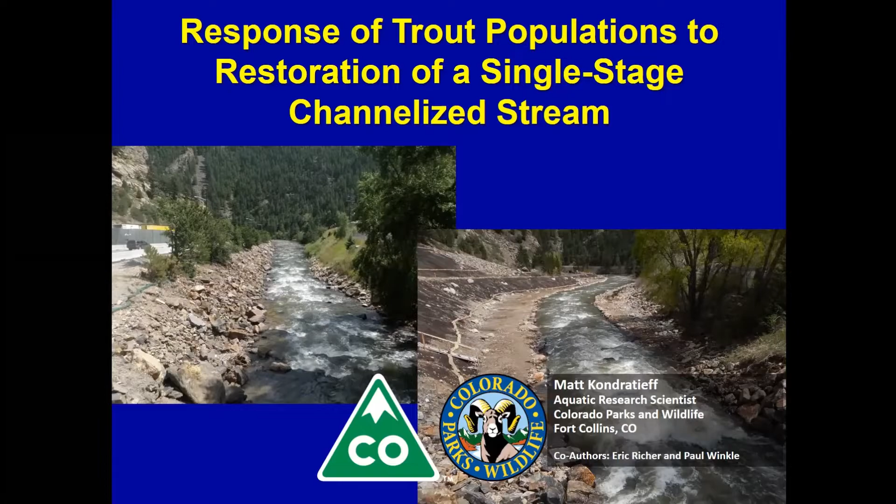So again, here's a picture of Clear Creek. This is a representative section of Clear Creek where, as you see, that's Interstate 70 on the right side of the photo with all the traffic. And then there was an old railroad grade on the opposite side of the highway. So a typical channelized single stage channel.

If you've never been to Colorado, this little project is located maybe half an hour to the west of Denver, and it goes through this little town of Idaho Springs. And like I said, it was a mitigation project for a tunnel expansion. This tiny part of Interstate 70 tunneled through a geologic bedrock feature, and the idea of the project was to expand the number of lanes through this tunnel. In doing so, there was an opportunity to do some mitigation in the area as a way of offsetting some of the damage that was done.

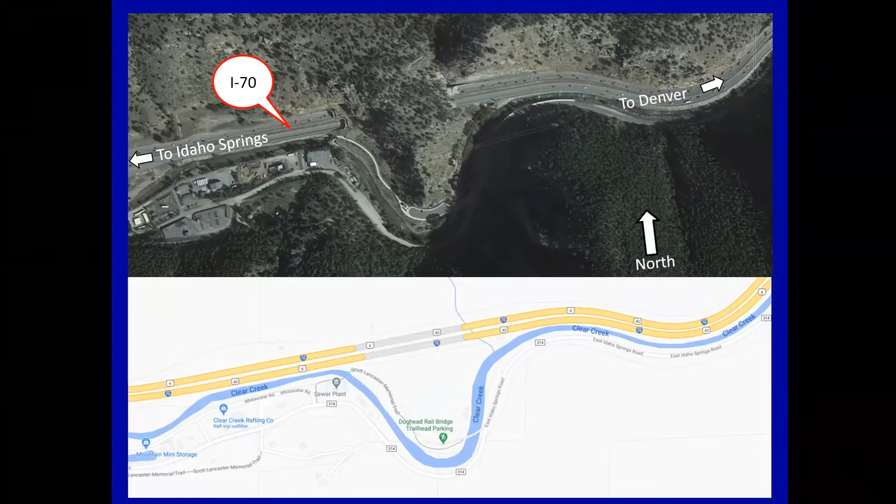So some of the goals that we came up with related to the idea of how do we enhance this trout fishery, and also the other part of that was, maybe we could try to restore this to a more natural, I wouldn't say reference reach, but we're trying to restore it to something that was more of a historic condition that would have been more the original channel form. So part of that involved, okay, well, we wanted to get rid of the riprap, so we were going to remove that armored riprap from the banks.

We were going to improve floodplain connectivity by converting the channel from a single to multi-stage channel and connect that stream to an active floodplain. Like I said, convert it from a single stage, meaning like that one cross section, expecting to contain all the expected range of flows that are coming down from the watershed. So we're going to convert it to a 3-stage, like a B(c) stream type. I gave this talk earlier to a group of folks who are primarily fish biologists, but I'll go through this real quick.

But the idea behind a single stage channel, it's a one-size-fits-all channel. For the most part, you're expecting that cross section to contain the majority of flood flows, all flows that are coming down. So you've disconnected more or less from the original floodplain. You typically don't have a lot of riparian vegetation because you've got armoring on the banks. You've got that 3-to-1 sort of slope. Typically they have very low bed form diversity in terms of pools, riffles, and even habitat. Boulders and logs and wood are typically kind of reamed out of the channel and removed.

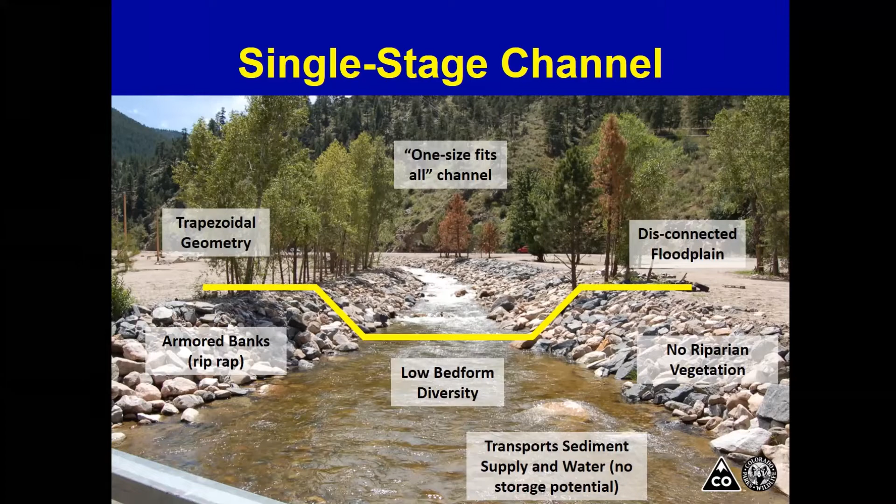So in contrast to that, what we were hoping to do was convert this back to a 3-stage channel or a B stream type. So in this case, you have the 3 stages: the low flow or inner berm channel, also known as the thalweg. So that would be the lowest elevation stage. Then that cross section's nested within a bankful stage channel that corresponds to that flow that occurs on average every 2 out of 3 years, roughly.

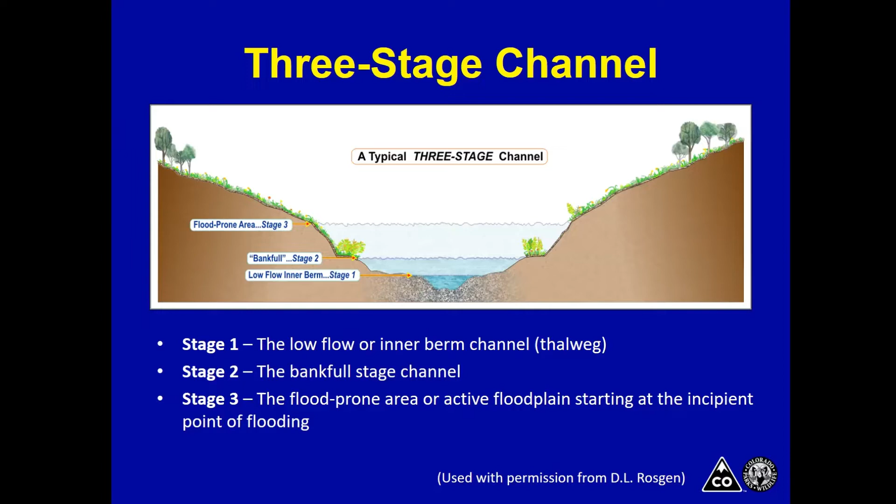And then creating a flood-prone area or the active floodplain that would start at bankful elevation and go up from there and meet up with a terrace at a higher elevation. So that would be used more to accommodate the flood flows and allow for hopefully some riparian vegetation like willows, alders, cottonwoods to reestablish on that surface.

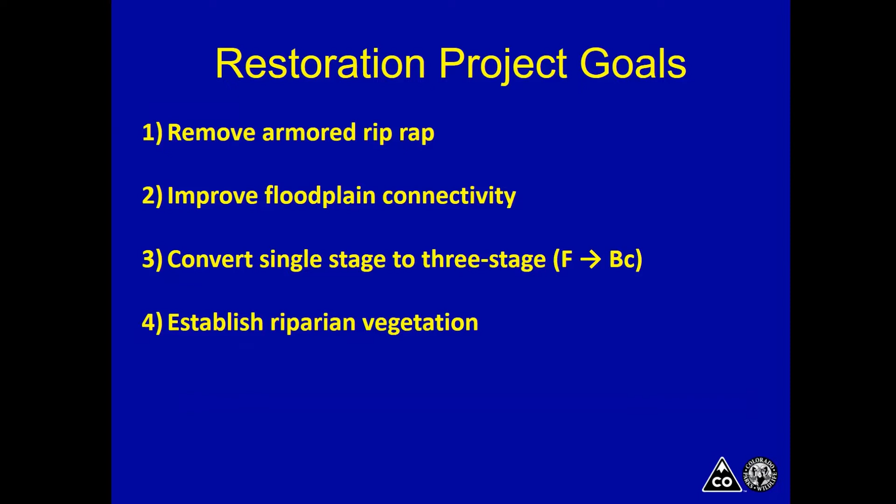So that leads to the next goal, which was to establish riparian vegetation through the means of establishing that active floodplain, and then enhancing in-channel bed form diversity features. And functionally, we were hoping for things like improved velocity cover for trout, so creating some locations where fish could find a balance between feeding and resting, whether that's in the form of cover or obstruction to flow like large boulders or logs or wood. Creating depth cover in the form of deep pools, and then developing hopefully some spawning areas for those trout.

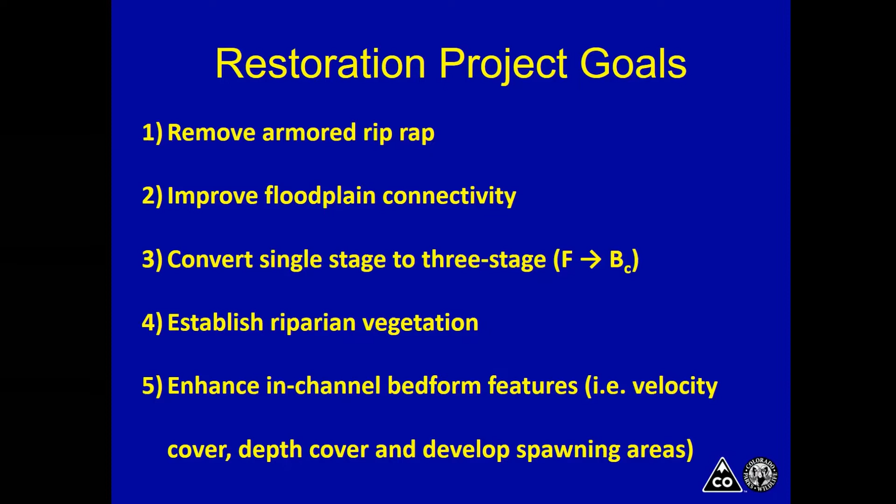It turned out that unfortunately we had planned to do work on this entire stretch related to those goals and objectives, but we were limited below the bridge due to the geology of the system. So we ran into some bedrock features that prevented us from expanding the floodplain, but also there was a house and some other infrastructure downstream that prevented us from fully converting the single stage to a 3-stage. We couldn't really get a floodplain established. So it became a little experiment at that point.

Our approach had to shift and change downstream of the bridge. So instead of being able to reform or shape or excavate the floodplain, create that new floodplain downstream of the bridge, it was just going to remain as a single stage channel. And we were then going to have to just work with that and try to do what we could to enhance the habitat in spite of that constraint.

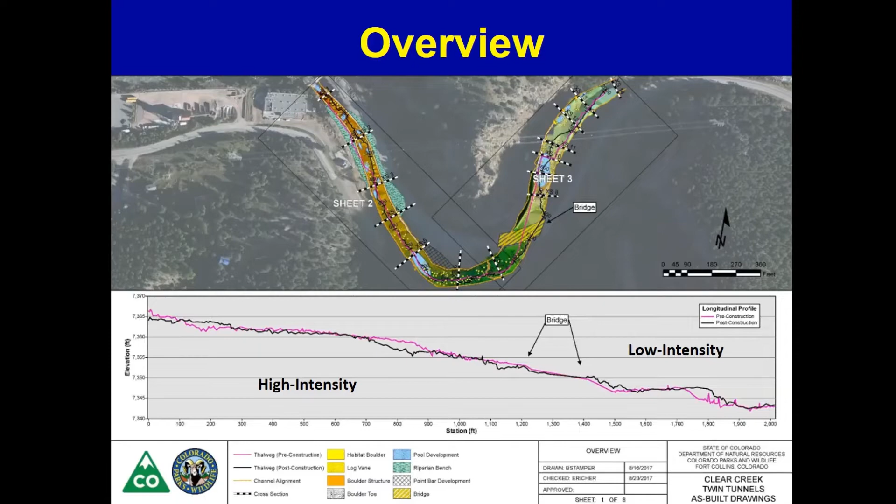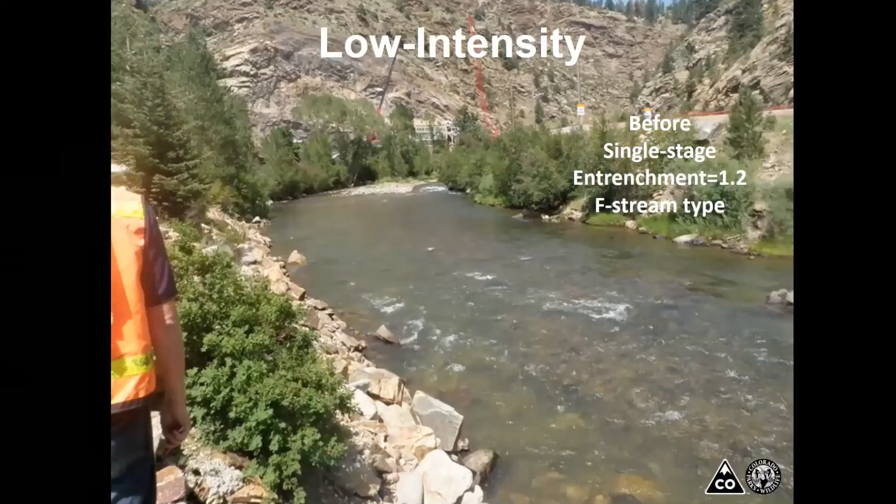So this is what it looked like. Again, low intensity. There's that island I was referring to in the downstream portion, and the side channel on river left. This is what this section looked like before construction, and it was a single stage. It classified as a Rosgen F stream type with an entrenchment ratio of 1.2. That's just the ratio of the width at bankfull contrasted with, at a riffle, 2 times the max bankfull depth, taking the width at that elevation: the ratio of your flood prone width to bankfull gives you an entrenchment of 1.2.

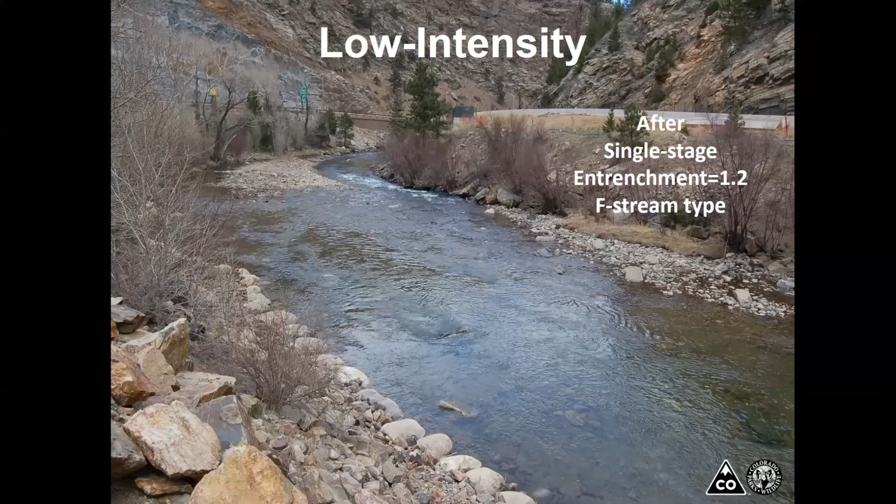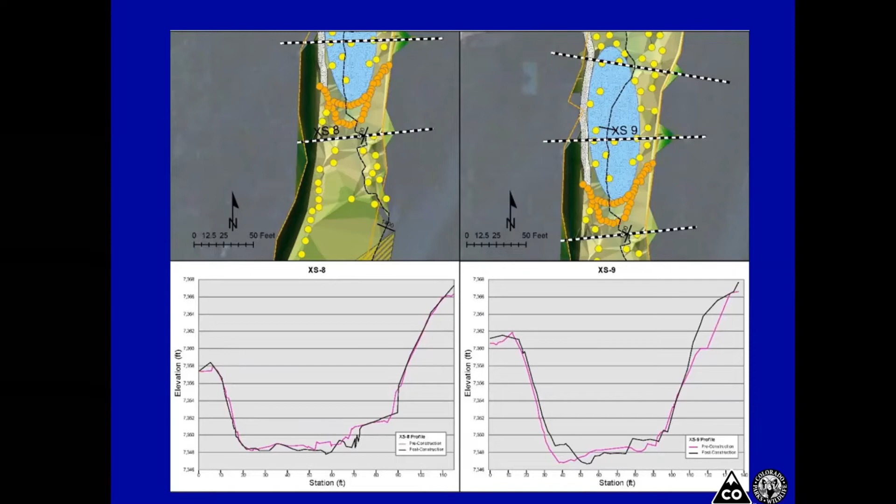And then another, cross section 9 downstream. The pink line again is pre-construction, black is post-construction. Notice very little change. We just shifted the thalweg slightly and you've got that pool now present, but not a whole lot of change at all with the floodplain.

So in terms of what we did in the low intensity reach, we added 81 single habitat boulders. That was 35% of the total project. Boulder structures, in terms of a cross vane, we had 1 of those. There were 9 total in the project, so that's only about 10% of the project total. Boulder toe, 9%. We didn't need to do much because the banks were still riprapped and armored. Pool development, we created 4 pools. Point bar development, 0%, and the big key there is no floodplain development, 0% effort in that reach.

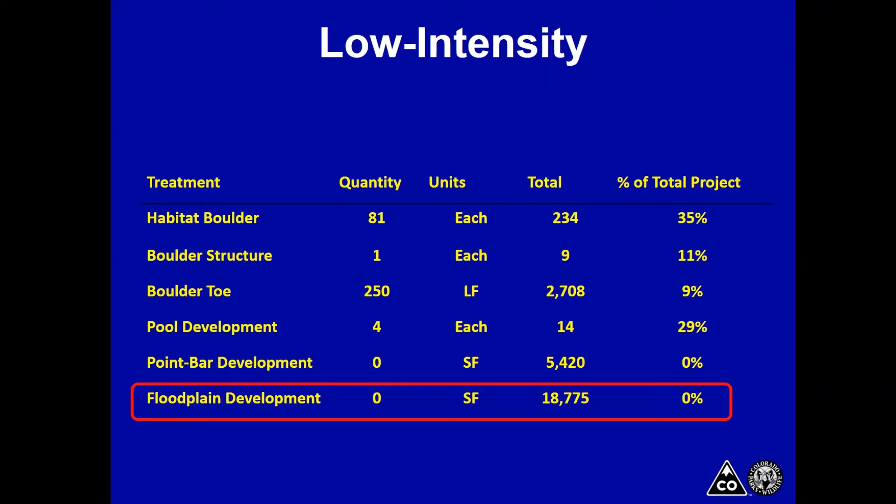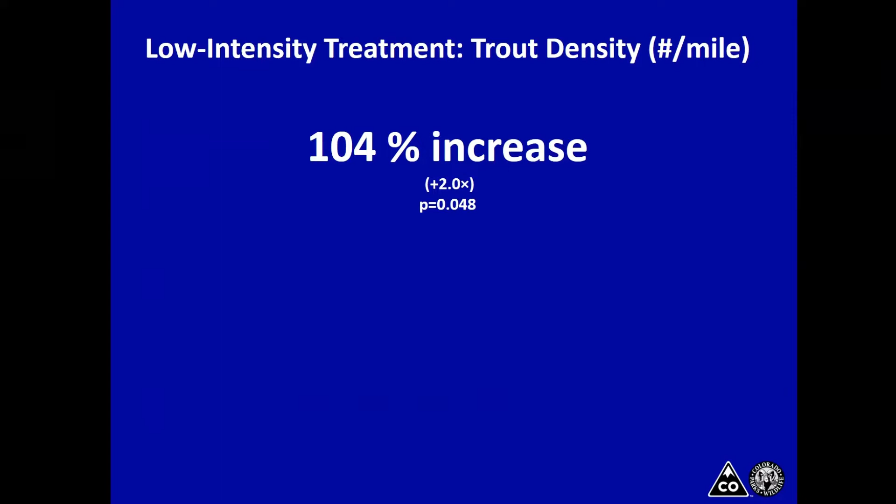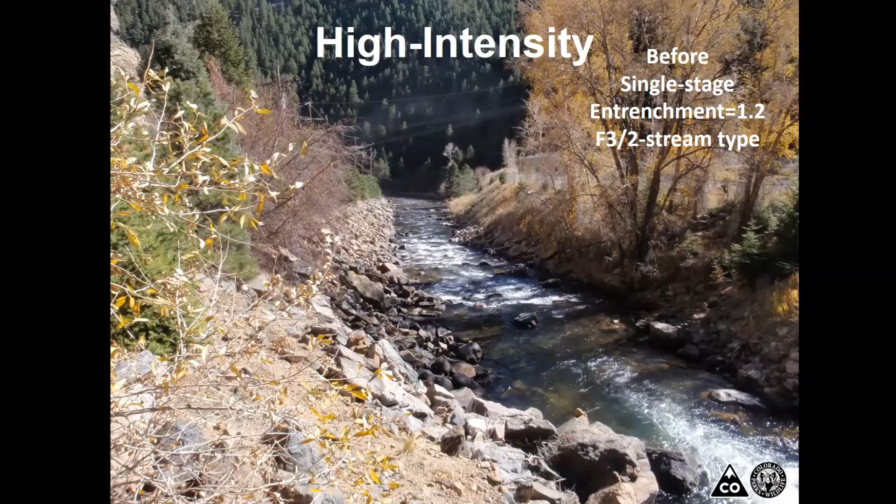And this is what this section looked like before. A single stage with the same kind of classification as downstream, entrenchment of 1.2. It was classified as an F3, so boulder and cobble type of substrate. And so this is what it looked like afterwards. CDOT took all this material that was originally part of the banks, and they moved it to a location.

They moved literally all of that dirt above the tunnels and filled in a massive void that they had created above the tunnels to try to revegetate that area. So it was nice to have a home close by. Otherwise, I don't think we would have been able to do this project, because what do you do to waste all of that material?

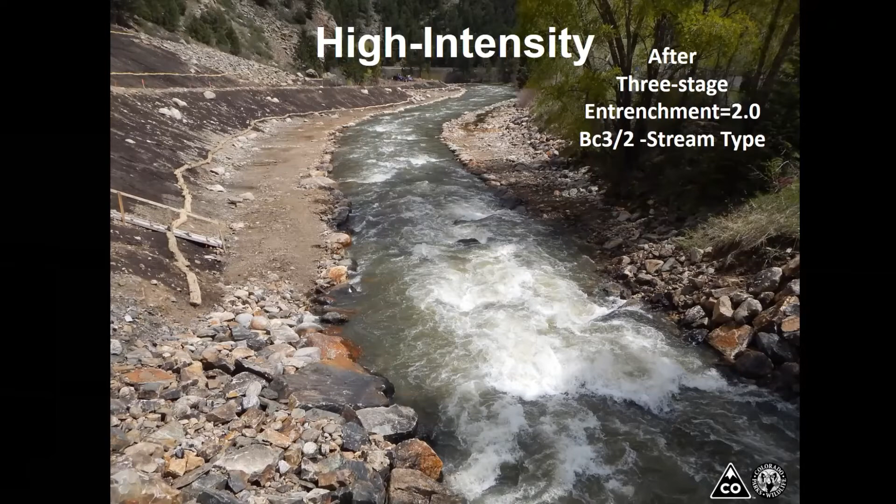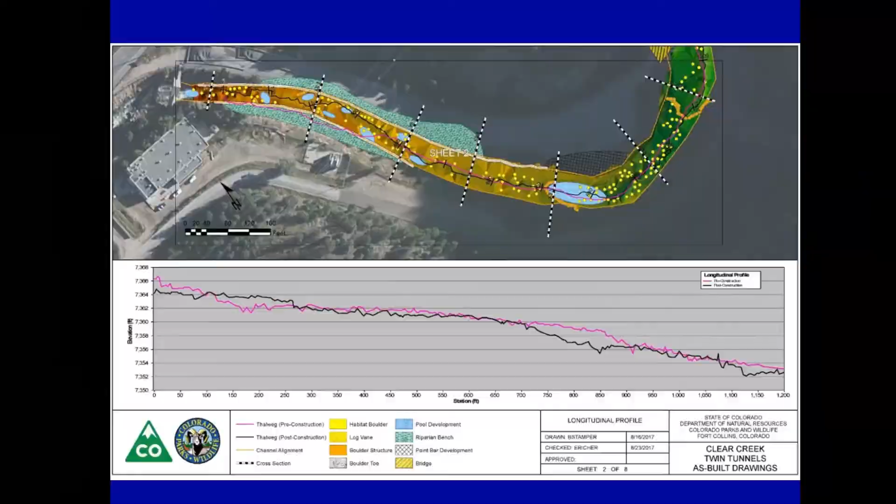And in terms of cross sections, this might tell the story better than anything. The pink lines again are the before cross sections. The black is post. In particular, here at cross section 2, you can really see how we expanded the floodplain area dramatically, gave the river a lot more room, and took out a massive amount of material. As you can see below that pink line, all that was material that we pulled out.

And then the same with cross section 3 downstream. That difference between the pink line and the black line on the left side of that cross section, that's all the material that was wasted and we got rid of.

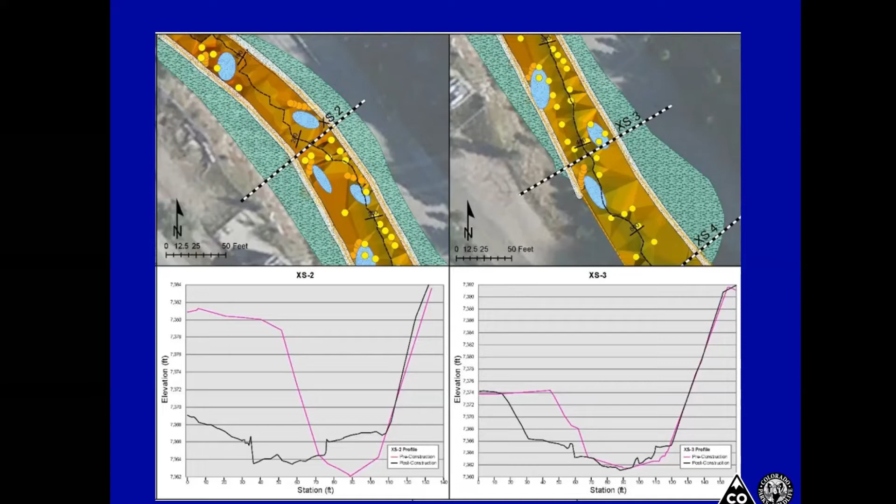So in terms of high intensity, what did we do? The big point here is we put a lot more effort in terms of the number of boulders that were placed in this section. And obviously the point bar development and floodplain development were massively contrasted with the downstream low intensity reach.

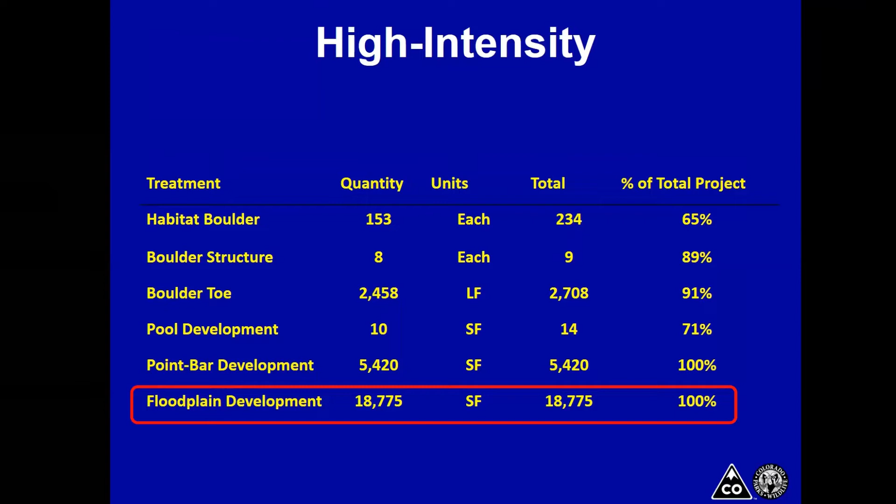So here's our data from the high intensity treatment, where we built an active floodplain. Trout density is on your y-axis, and years on the x-axis. It's the same format as I shared earlier, but notice there is a little bit more of a relative increase in trout density between before and after in this section. And there's a nice trend of increasing density over time.

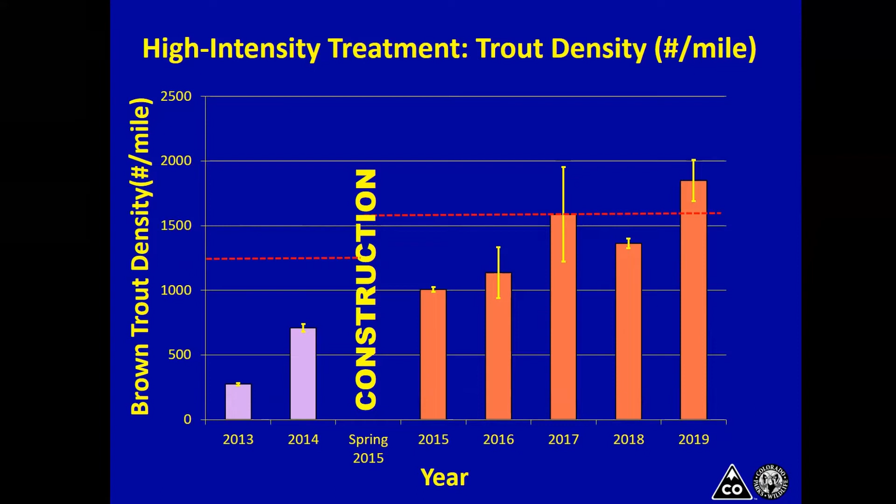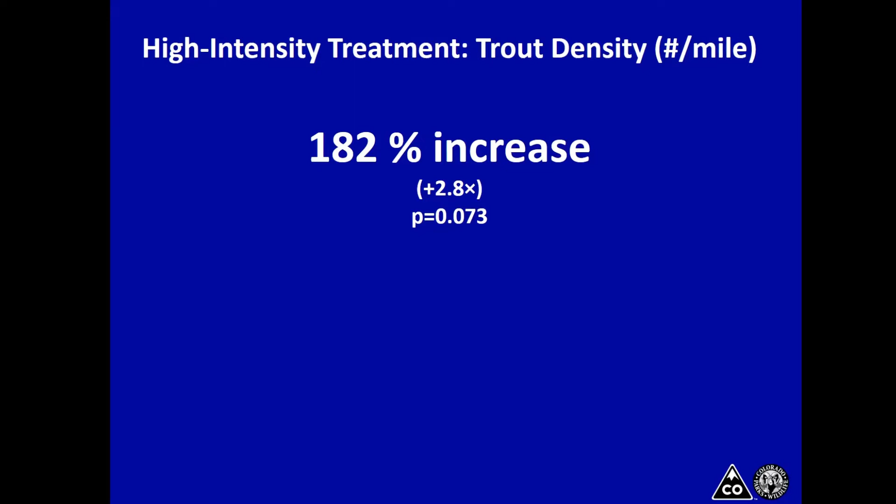So that works out to be about a 182% increase in trout density, or almost a tripling of the number of fish per mile in this section from before and after.

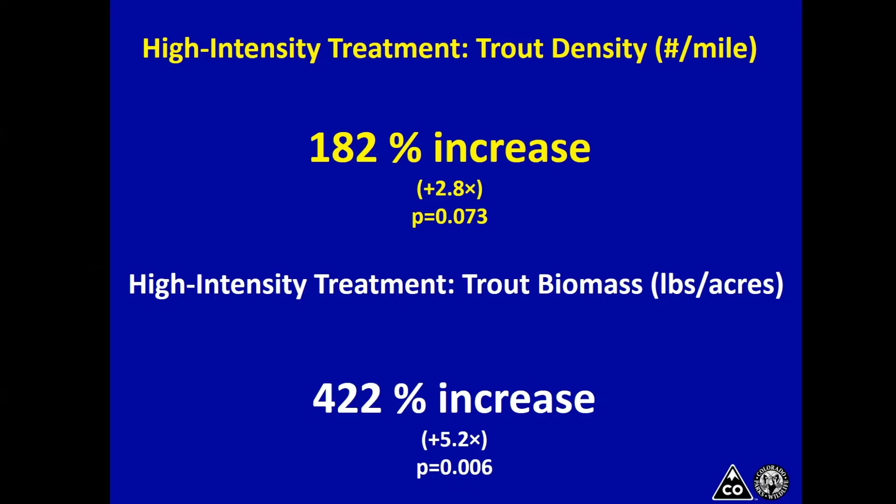And then in terms of biomass, pounds per acre, before versus after, you can really see a dramatic shift with more trout pounds per acre in the post-monitoring period. It was very, very significant. We saw a 422% increase, or over 5 times the trout biomass in the section where we built the active floodplain. This is comparing before and after.

So in conclusion, departing from natural conditions, such as channelization of rivers, has some negative consequences to fish populations that might not recover without some form of physical intervention. So really, the message there is it has a tendency to repress the trout population, putting rivers in a channelized state and leaving them there.

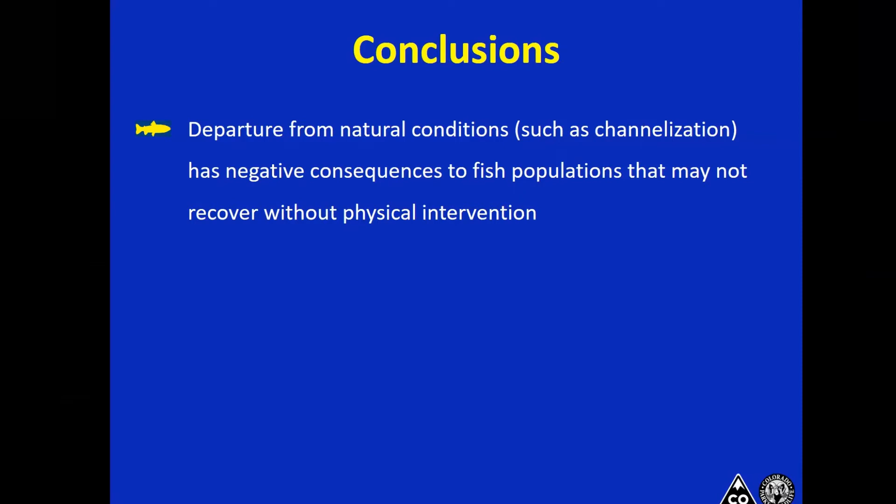Restoration of channelized single-stage streams to a multi-stage channel form with a functional floodplain has the greatest potential for increasing trout biomass and density, even over standard habitat treatments such as J-hooks, cross vanes, and adding wood. Those are all really helpful, but they don't get near the magnitude of change you could expect if you're able to convert that single stage into a multi-stage channel form and really give the flood flows a place to expand over bankfull stage onto a floodplain.

Channelization and loss of floodplain connectivity have the potential for devastating impacts to wild trout populations. Something I forgot to mention is that we never stocked any trout in this reach.

These were all wild fish, meaning that they were basically fish that naturally reproduced in this system. There was no stocking. So all my estimates I showed with you were a result of monitoring these wild trout populations. So that's it. That's what I have.

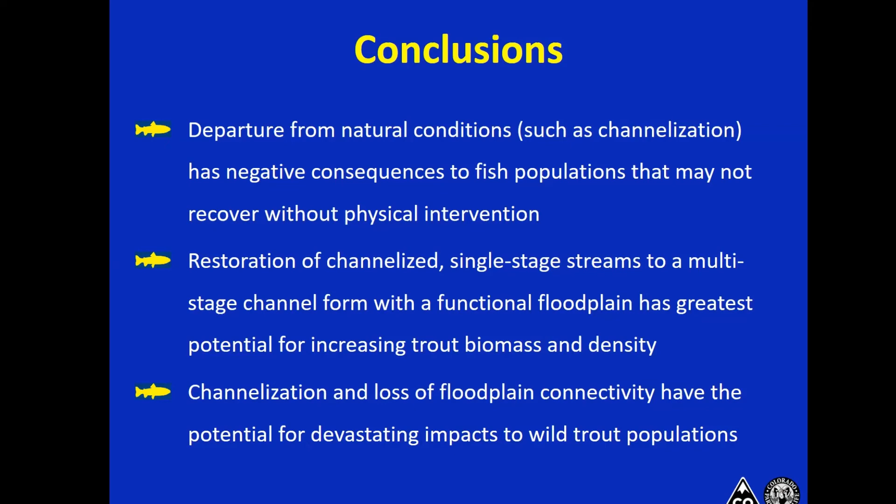What are our alternatives? And I do want to point out that we did see an improvement, as you saw, in spite of the fact that we weren't able to build a functional floodplain in that lower section. So I don't want to downplay that. I just mainly was trying to show that the magnitude of increase was much greater where we could potentially do something to create an active floodplain.

But I think part of it, Dave, is I really think there's a need to start networking, in the sense of, if there's a biologist who's got a similar project to what you see here, where there's an opportunity, or you're involved in a project and can work with somebody to collect monitoring data, it's so important that we build a case. I have this nice, tight little case study, but it's only one case study.

And if we end up with 5 or 6 of these that are all showing the same things, from the Midwest to the Rockies, out west, East Coast, where we have this documented shift or change, it really helps build the momentum and the case that this isn't just some isolated little case study where this unique situation occurred, but there's more momentum to say, yeah, this really is important.

And not only should we consider channelizing rivers as having the potential for massive detriment to the trout population or any fish population, but maybe also the incentive to do something in terms of restoration that, although it might add additional cost, could be really beneficial and have huge gains for fisheries. So anyway, answering your question, I think it's partly collecting more case studies from other regions across the U.S. or Canada.

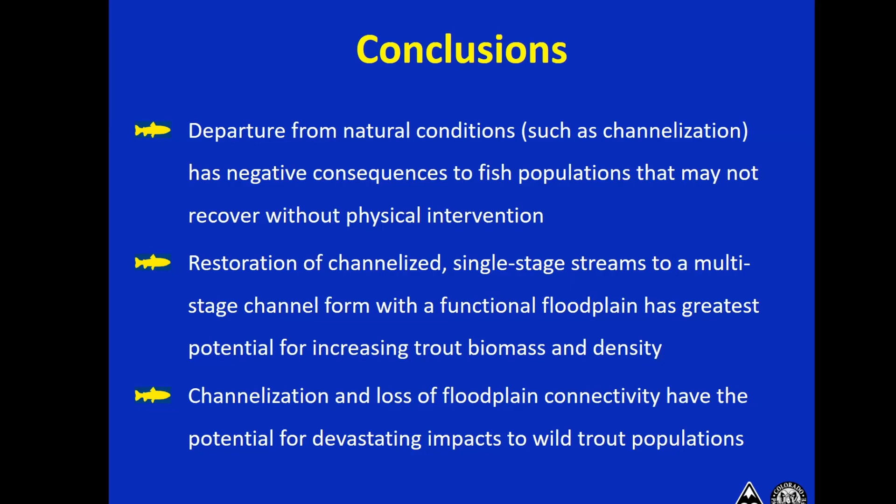We're seeing a real positive response overall, for the most part, from discussions with our biologists, and that monitoring is continuing. So maybe down the road we'll have another presentation that puts all of that together, the whole transition. But the challenge still is there are places where the river,